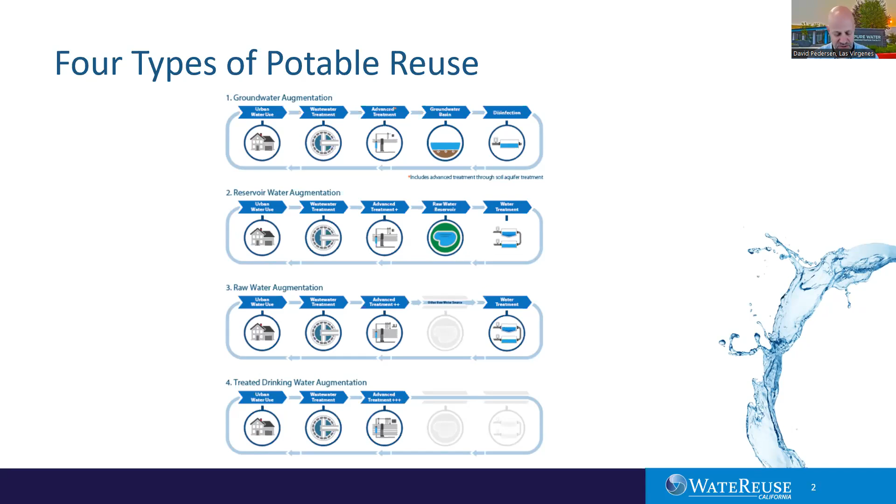What you're seeing here are the symbols that represent the different elements of the treatment strategy, beginning with urban water use at a home, the wastewater treatment. That is common for all of them, followed by advanced water treatment. And then you'll see the variety in the last 2 steps: the use of a groundwater basin in the top strategy, a raw water reservoir in the second one, and then in the final 2, a more direct strategy involving either water treatment or direct delivery into the distribution system. Typically, the first 2 have been referred to as indirect potable reuse, or IPR, and the last 2 as direct potable reuse. So just a little bit of nomenclature.

I wanted to talk about the path to get to where we are. Last year in December, our State Water Board adopted regulations for direct potable reuse. It was quite a long journey to get there, dating back 13 and maybe even more than 13 years. WateReuse, our association here in California was a key part of that, along with our legislators, and probably many of you played a role. I'm going to highlight just a few of the critical elements, emphasizing the role of both research and legislation in driving this.

Back in 2010, there was a landmark legislative measure, SB 918, authored by Senator Fran Pavley, who represented my service area and still is a customer here at Las Virgenes. That bill called for two important things: first, to develop and adopt uniform water recycling criteria for indirect potable reuse—essentially, regulations for indirect potable reuse. Second, it called for evaluating the feasibility of direct potable reuse. That legislation set the groundwork for what was to follow over 13 plus years.

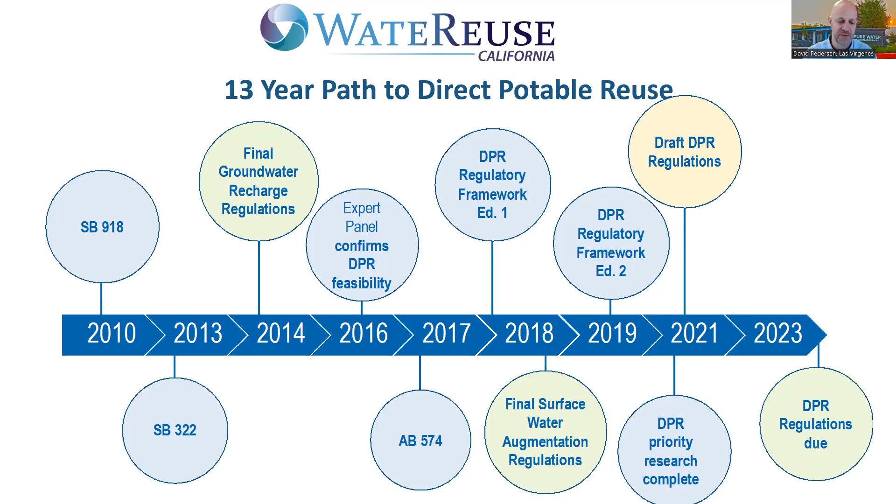In 2017, there was a second legislative bill, AB 574, authored by Assemblymember Bill Quirk. That took the next step, calling for the State Water Board to develop and adopt the direct potable reuse regulations by December 31st of 2023—a goal the State Water Board ultimately did meet, adopting those regs on December 19th. A few other milestones: groundwater recharge regulations were adopted in 2014, the first pathway I showed on my previous slide. Then the final surface water augmentation regs were developed in 2018. The DPR regs covered both varieties of direct potable reuse: raw water augmentation and treated drinking water augmentation.

So big picture, looking at the role of water recycling in our state, what these regulations really do is help advance the emphasis that California has on water recycling. There's a variety of reasons for this, but probably most important is that water is too valuable to use only once, and that we have a great resource in our treated wastewater to recycle and recycle more, create a new drought resilient water supply, and to do it cost effectively.

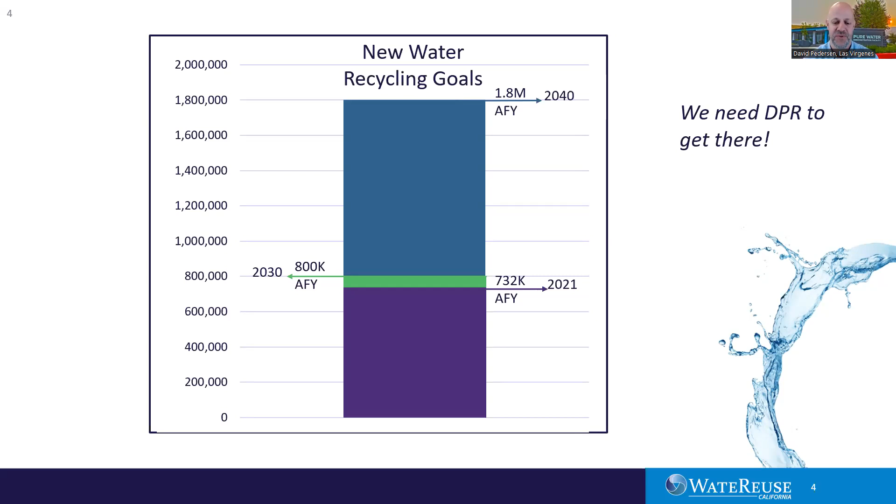The organization that is doing the project, or organizations plural, the chemical control, pathogen control, the monitoring mechanisms and control of the treatment, and then the capabilities, which are referred to as technical, managerial, and financial, of the agency that is doing the work.

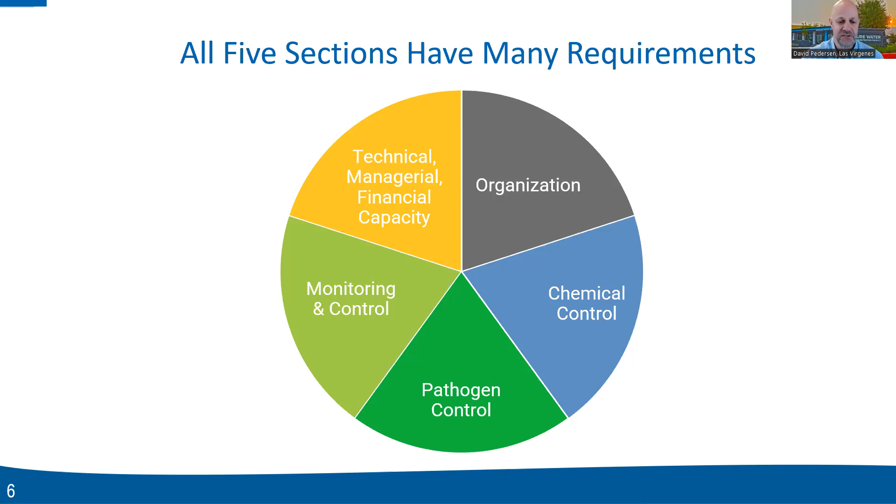So in terms of the organization that's responsible, the term that you may have heard is DiPRRA, which is just the acronym for Direct Potable Reuse Responsible Agency. I know that's a mouthful, and so that's why we've been using the word DiPRRA. In short, the DiPRRA is the agency that is essentially accountable to ensure that the regulations are met.

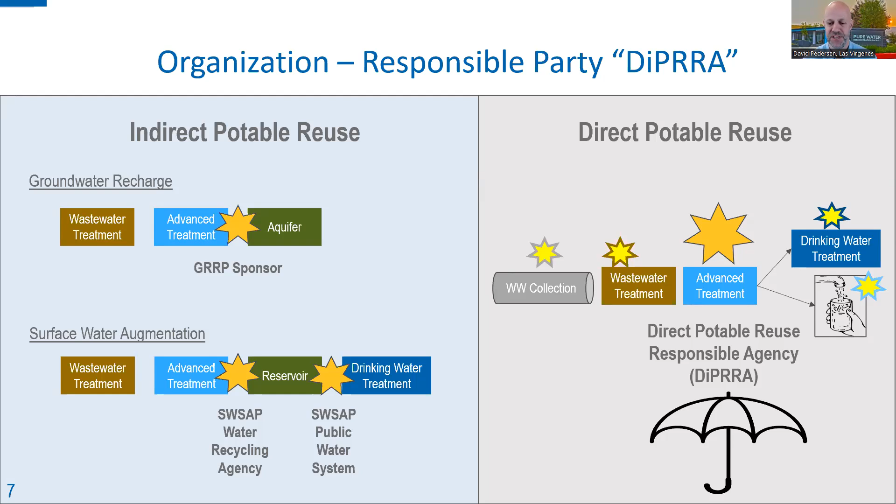And you can see on the left is the indirect potable reuse companions. They use slightly different terminology: groundwater replenishment reuse project sponsor, also a mouthful, and surface water source augmentation project sponsor. So that is sort of the who, and you'll see that there's a combination of wastewater and water. Essentially, the key element here is the party that is operating and responsible for the advanced water treatment and placing the water ultimately into the drinking water system is the DiPRRA.

So chemical control, a really important part of the regulation, and I would say a distinguishing factor from indirect potable reuse in terms of treatment train and process. This is probably the most technical slide I'll have. There is a new requirement of an additional treatment process that is unique to direct potable reuse that you will not find with indirect, and that's the inclusion of ozone and BAC. So ozone BAC is required as part of the treatment train for DPR, and it needs to be in the order shown here: at the beginning of the treatment process before RO and UV or advanced oxidation.

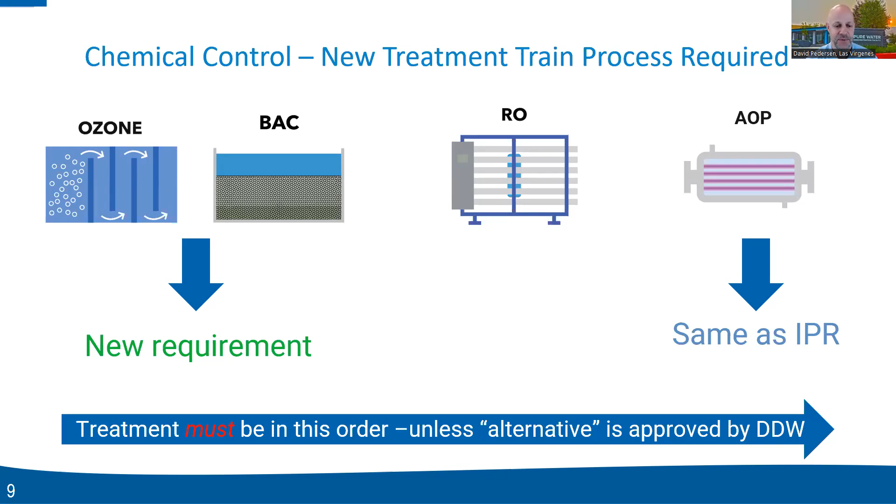And the reason for that is chemical control. Source control on DPR is a really important element. Those of you in the wastewater business are familiar with source control. On the drinking water side, maybe a little bit less so, but now that the two are coming together, it is really important to have a robust source control program to ensure that some of the exotic contaminants are not getting into our wastewater system that is ultimately reaching advanced treatment and possibly passing through that treatment or creating a higher risk in terms of contamination of the drinking water.

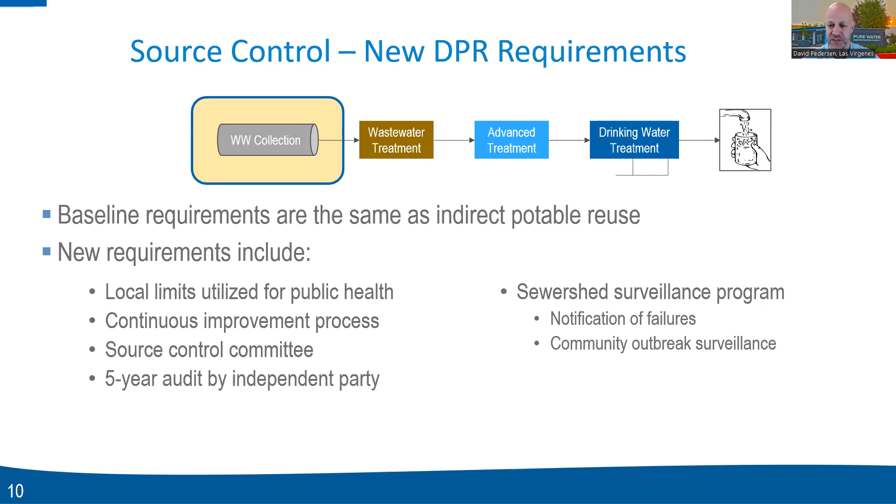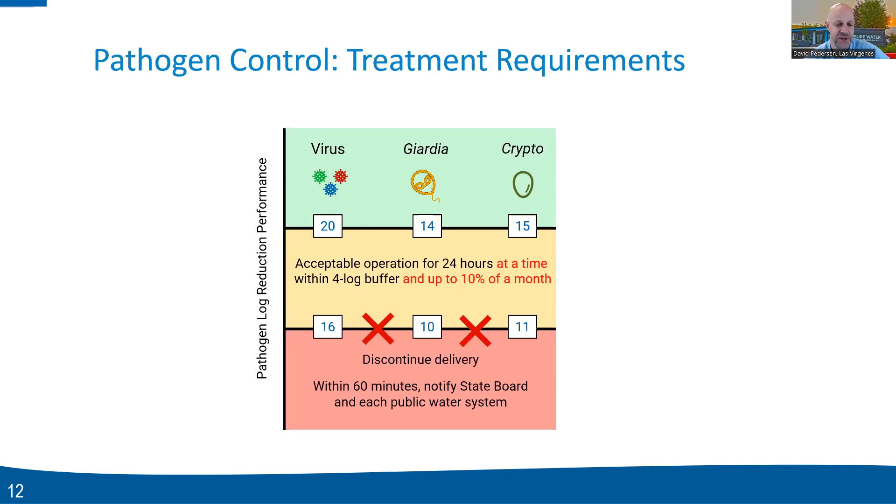That reflects what needs to be achieved before discontinuing operation of the plant. There's acknowledgement that there may be times where a certain element of the treatment train may not be completely effective, but because it's a multi-barrier treatment system with redundancy, the process doesn't necessarily need to stop immediately. But if you do drop below any of those numbers, 16, 10, and 11, you need to shut down your treatment system, the delivery of water to the system, and make notification.

I'm going to stop sharing and highlight one final point before introducing Daniel. Going forward with direct potable reuse, what we're talking about is taking water recycling to the next level in California. There are a couple of guiding principles that are really important here, and they all revolve around three things: trust, transparency, and safety.

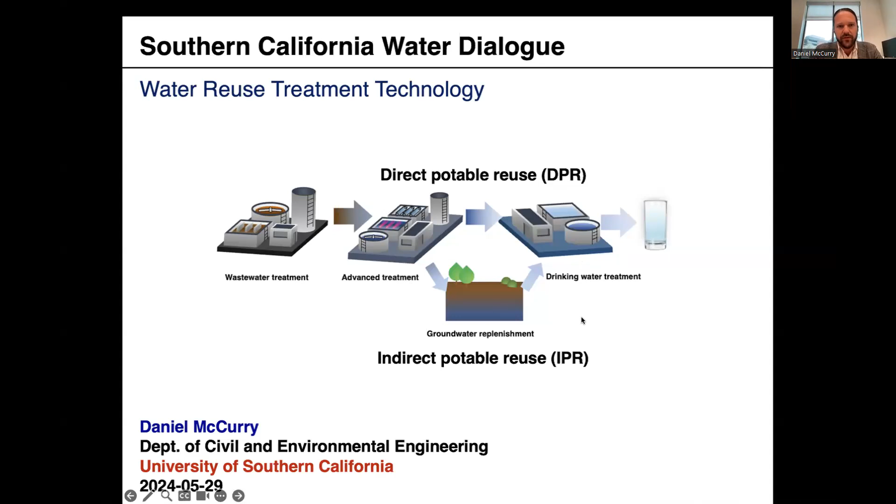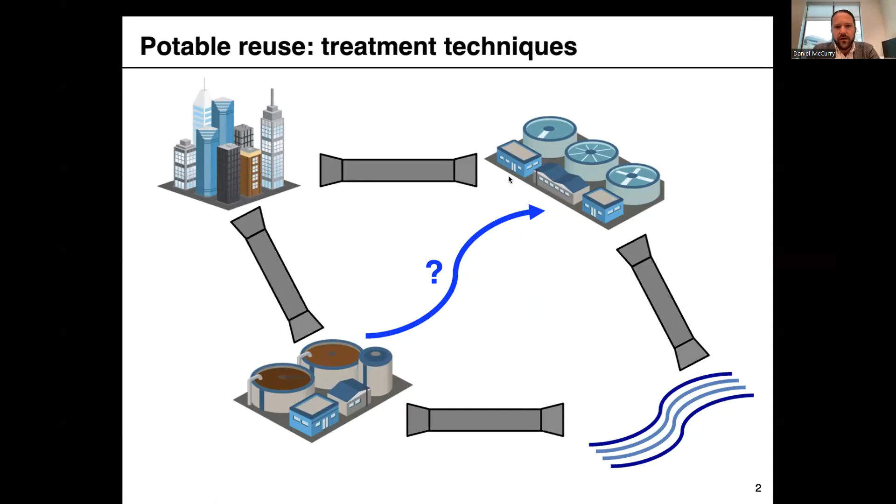In other words, what sort of engineered processes does it take to go from treated wastewater effluent, say the water coming out of Hyperion that would normally be discharged into the ocean after biological treatment for safe ecological discharge, and upgrade that water quality to a point where we can potentially use it as a drinking water source? Before I talk about treatment technology itself, I wanted to talk about what exactly we're trying to get rid of. Dave teed this up nicely already by talking about log removal and these pathogens.

Before I talk about direct potable reuse, let's look at the existing indirect potable reuse regulations. We have three rules for removal of three different types of pathogens: Giardia, Cryptosporidium, and viruses. Giardia and Cryptosporidium are both single-celled organisms. Giardia is commonly associated with drinking untreated water in the woods if you're backpacking. Cryptosporidium was associated with a major waterborne illness outbreak in Milwaukee about 30 years ago, so that's been at the top of our mind for pathogen control in the water business. And various viruses can make you sick as well. So these are the existing rules for indirect potable reuse, the 10-10-12 rules.

Because this concept of log removal is often not explained in detail, I thought I would introduce it, since I had to honestly look it up for myself as a graduate student to figure out where these numbers come from.

I thought it would be wise to start by talking about removal or percent removal, which I think is the more intuitive way to understand how well disinfection has worked. This corresponds to the number you might see on hand soap or hand sanitizer. As a thought experiment, removal as a percentage is just 1 minus the number of organisms alive after disinfection divided by how many you started with. So as a simple example, if you had 100 viruses at the beginning of disinfection, and at the end there's 1 left, that's 99% removal. That should be pretty intuitive.

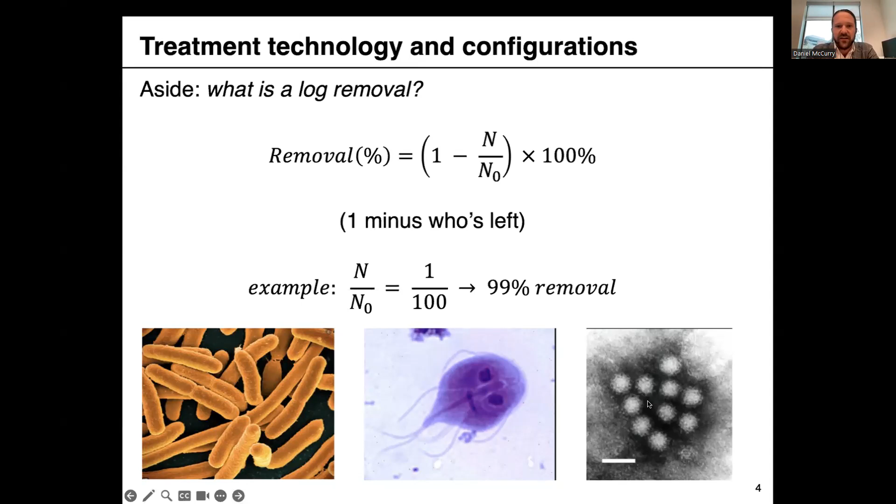The problem is that once you start adding more 9s, this gets cumbersome. If you run it out past about 99.99%, it starts to get a bit unwieldy. So in our business, we've invented a new way of expressing the degree of disinfection called log removal. This is the only slide with math on it in this presentation.

For log removal, you take that same n over n-naught value, the number of surviving organisms left after disinfection divided by the number you started with. Instead of subtracting that from 1, we take the negative log base 10 of that number. In case you haven't done logarithms in a while, I'll work through a quick example using the same numbers as before.

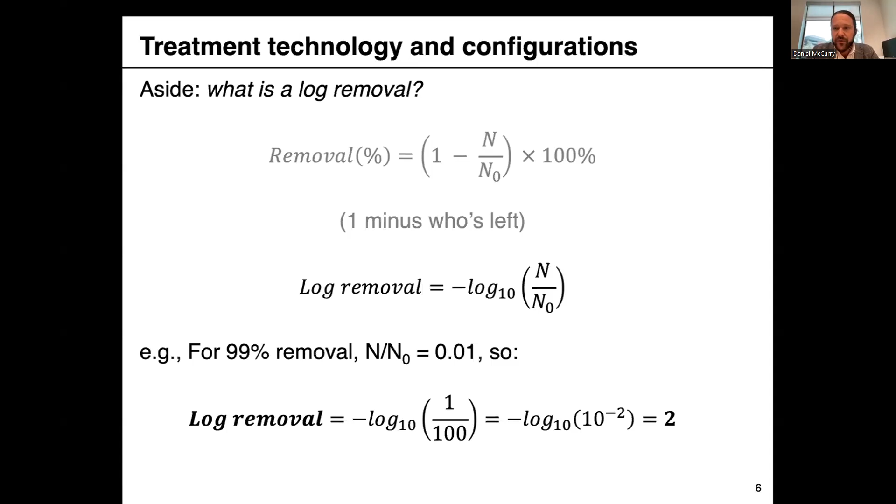If we have 99% removal, so we started with 100 organisms alive and there was 1 left at the end, n over n-naught is 0.01, which is 1 divided by 100. You can convert that 1 over 100 to 10 to the minus 2. If you remember pre-calculus, a log base 10 and a base 10 exponential cancel out, so you have minus minus 2, which gives you a log removal value of 2. That's how log removal values work.

So 99% removal would correspond to 2 log removal, 99.9% to 3 log removal, and so on. This system is a convenient shorthand once we get into high log removal values, because for instance 20 log removal, which we'll see in a second for direct potable reuse regulations, would be 99 points and then 18 nines after that—again, a bit cumbersome.

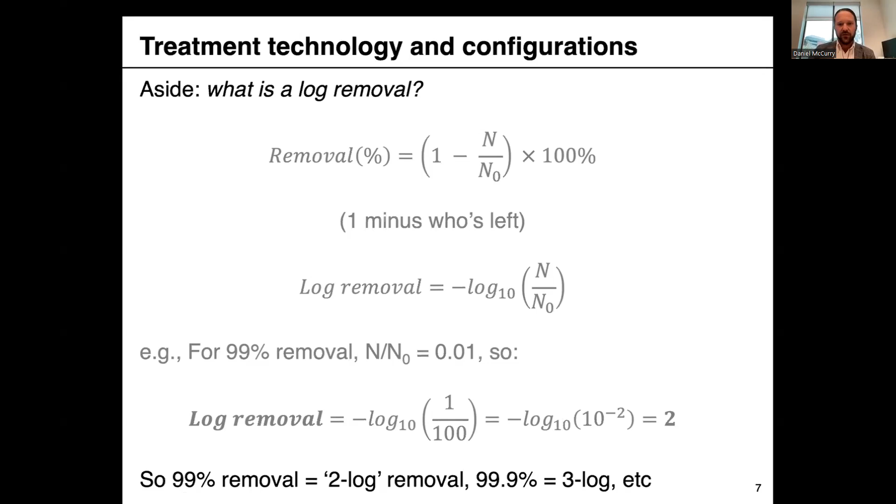As we move from indirect potable reuse to direct potable reuse, these numbers all get increased for each of the three pathogens. So it's the same pathogens as in the indirect potable reuse rules, but now the degree of removal has increased. For instance, we go from 10 log removal of Giardia to 14 log. If you undo that log transformation, that's a 10,000-fold increase in the degree of disinfection—you can only have 1/10,000th as many left alive at the end as would be permissible for indirect potable reuse. So these regulations are quite protective of public health, especially for pathogens, which is our number one concern, whether it's potable reuse or ordinary surface water treatment.

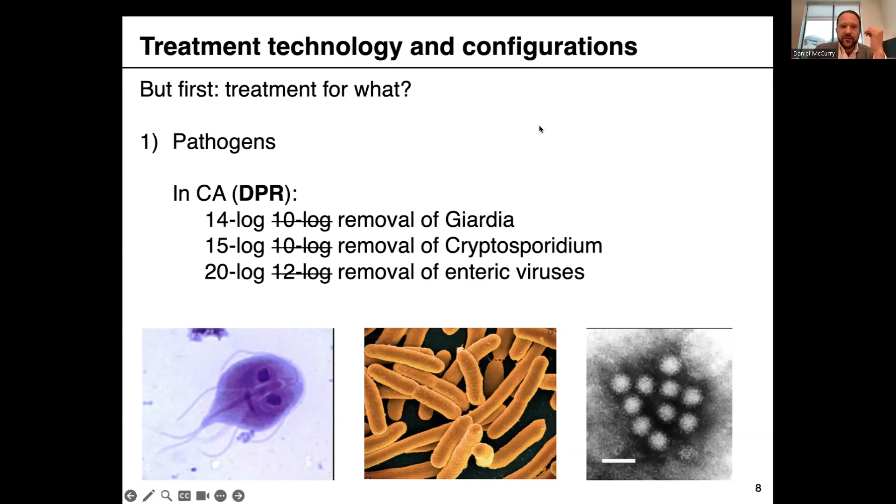After we've satisfied ourselves that pathogens have been adequately controlled, the next thing we need to take care of in direct potable reuse are chemicals.

This differs quite a bit from ordinary surface water treatment. If you're treating water from one of the aqueducts that brings water from Northern California, a lot of that is basically melted snow from the Sierras that's quite clean. In contrast, wastewater is full of all kinds of chemicals - anything that goes down the drain, whether excreted by humans or illicitly dumped by an industrial factory. These chemical concentrations are much higher than we'd worry about in an ordinary water source, so we need to be serious about chemical control.

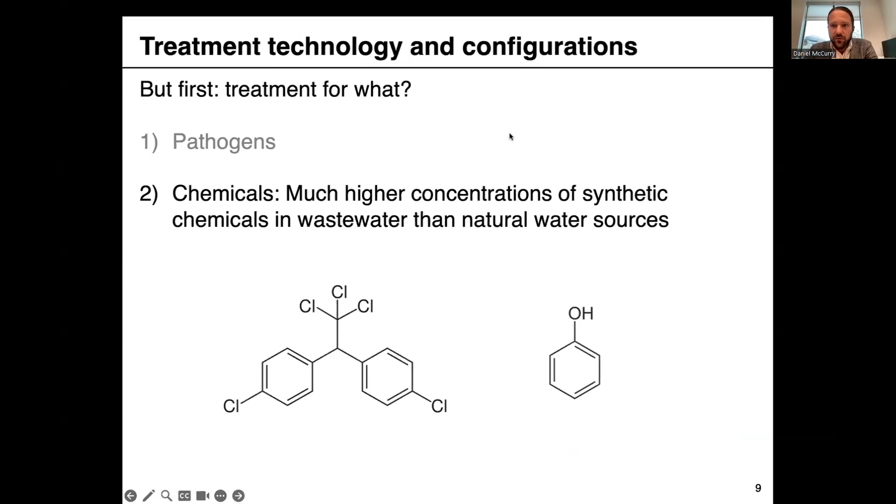First I'll talk about the indirect potable reuse rules, then move to direct potable reuse. In California, for indirect potable reuse, you have two options for demonstrating adequate chemical control. One requires demonstrating removal of 7 or 8 different compounds, choosing one from each of several categories. The simpler way is to demonstrate 0.5 log removal of 1,4-dioxane.

One of the other key reasons for choosing this compound is that it's almost unique in how well it can get through reverse osmosis, which is one of the key treatment steps for water reuse. So if we're doing a good job of 1,4-dioxane removal, we're probably removing everything else pretty well too.

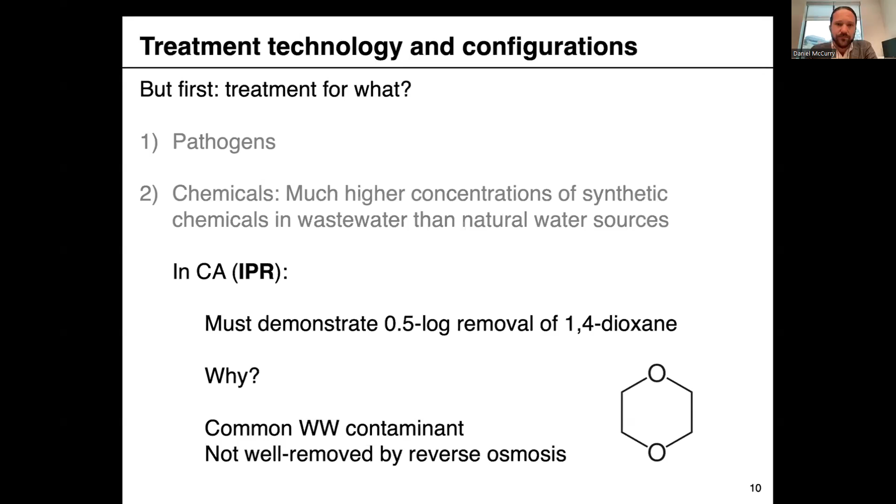As we move to direct potable reuse, a new compound was added - you have to demonstrate 1 log, or 90% removal, of formaldehyde, shown on the bottom right. It's a low molecular weight compound that can get through reverse osmosis very well, which is part of why it was selected. Another reason is that formaldehyde is often formed when you add ozone to wastewater, and ozone is a required treatment step for direct potable reuse in California - so we're getting ahead of a potential complication of using ozone. For all these regulated compounds, the reason we care about them is they're known or thought to be toxic to humans.

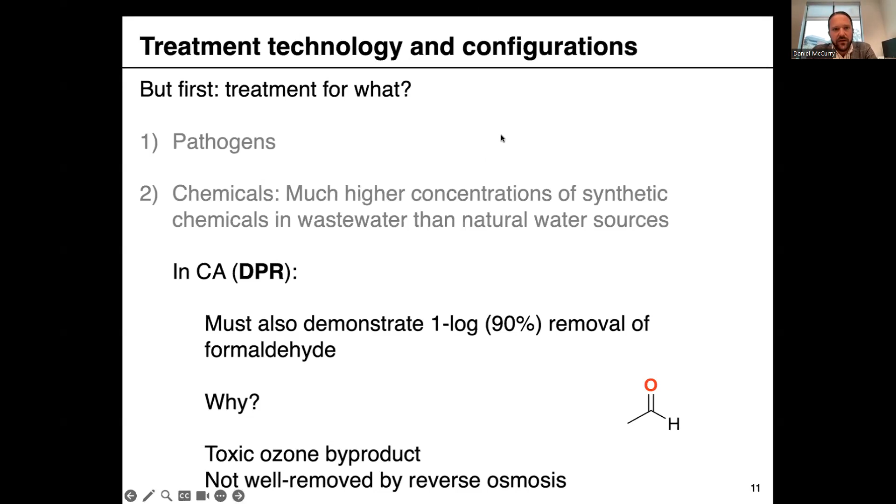Now let's move into how you actually get rid of some of these chemicals and pathogens. I'll begin with the existing state of things prior to the new rules passed in December. For indirect potable reuse, where recycled water is sent either to the ground or for surface water augmentation, the classical treatment train - spread pretty widely across the US and even the world, and a close approximation of what's at Orange County Water District, the largest water reuse plant in the world - has essentially 4 main water treatment steps. There are a few little adjustments here and there, but this is really the core of the water reuse treatment train for IPR.

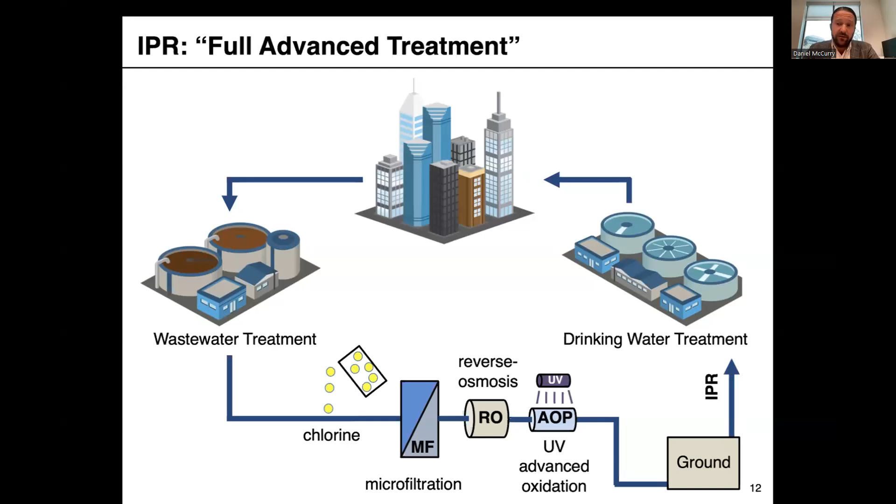I'll go through each of these steps in more detail, about one slide each, but to name them first: we first disinfect, often with chlorine, then remove particles with microfiltration, then remove even smaller particles and some chemicals with reverse osmosis, and finally treat any remaining chemicals with UV advanced oxidation.

The first step is disinfection, a chemical disinfection step that serves two purposes. One is to make sure we're killing off pathogens - many steps in the water reuse process are important for pathogen control, but the first one is just simple chemical disinfection, like we already do for surface water treatment, or like you might use to sterilize a cutting board in your kitchen.

The chemicals that we use for disinfection most commonly are either chlorine, which is literally the exact same stuff that's in the bleach bottle under your kitchen cabinet, or ozone. I'll talk more about ozone in a little bit once we get to the DPR section.

But one other thing I forgot to say is, besides pathogen control, the other important part of the disinfection step at the beginning of the process is that it helps control biofouling. Because the next two steps all involve membranes, and membranes can easily be clogged, including by microorganisms, which can grow in these sort of cakes that we call biofilms. We'd like to minimize that to the degree possible, so we don't have to spend as much time and effort cleaning membranes, which requires taking them offline.

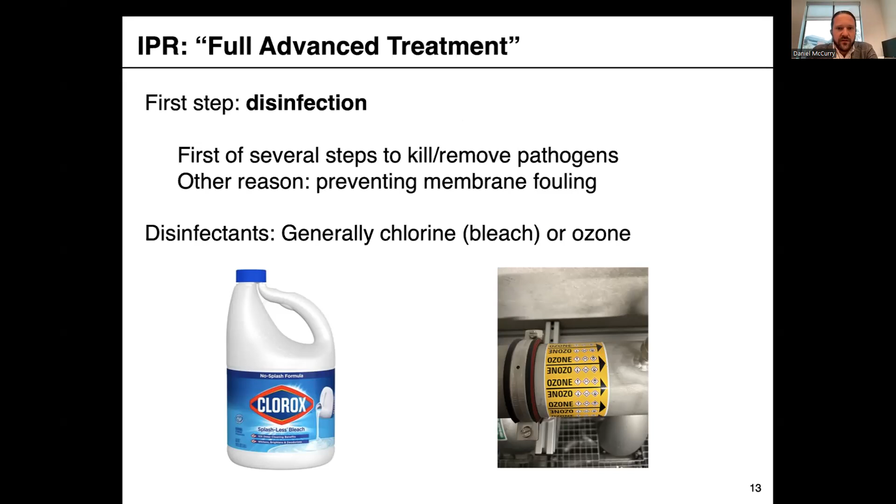So then the next step in the treatment process involves membrane separation, sometimes called filtration, although people argue whether or not reverse osmosis should be considered a form of filtration. But regardless, it's often microfiltration, maybe sometimes ultrafiltration, but those are closely related, and then reverse osmosis. I'll say just a few words about each of these individually.

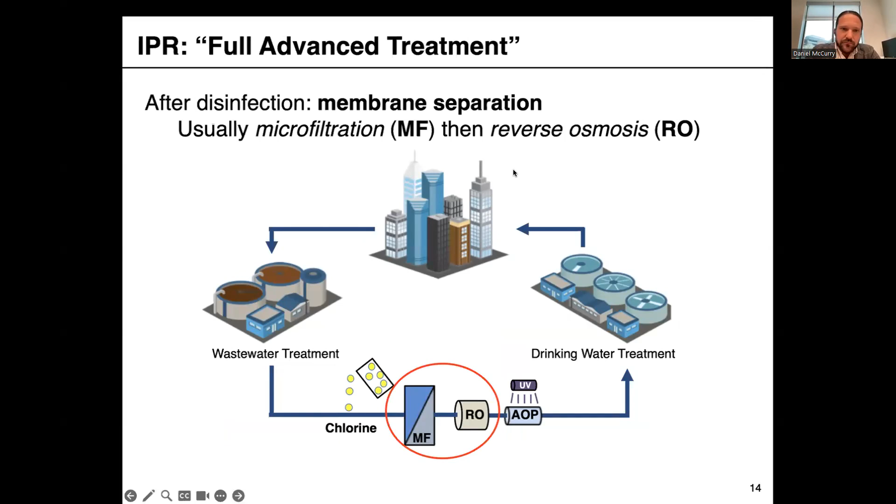Microfiltration, as the name implies, is a filtration step meant to remove particles on approximately the 1 micrometer or 1 micron scale. That can be anything from just dirt, literally silt particles that might end up in the drain, and also some bacteria or other types of single-celled microorganisms. It won't do anything about viruses, for instance, because those are too small and will pass through the microfiltration pores. But many bacteria can be removed, as well as particulate matter.

Part of why we want to remove particles at this stage is that if we leave particles, which again can just be dirt, in the water, it can interfere with some of the subsequent steps. It could lead to clogging of the reverse osmosis membrane, or sort of light screening in the UV advanced oxidation process, which is not really ideal.

Then after microfiltration, we have reverse osmosis. This is another type of membrane separation process—again, people argue about whether it should be considered a form of filtration or not. But essentially, the goal of this is to remove almost everything except for water molecules. Sometimes people, as a shorthand, will say that reverse osmosis removes everything but water. That's not quite true, as we'll see in a second, but it does a very good job of removing almost all chemicals. So essentially anything that's charged, any ions, are extremely well removed.

That includes just salt, as well as any chemical that's above a certain size. You might encounter a molecular weight cutoff of something like 100 Daltons for things that tend to be removed well by reverse osmosis. So it's a very robust treatment step—arguably the most important central water treatment step for water reuse.

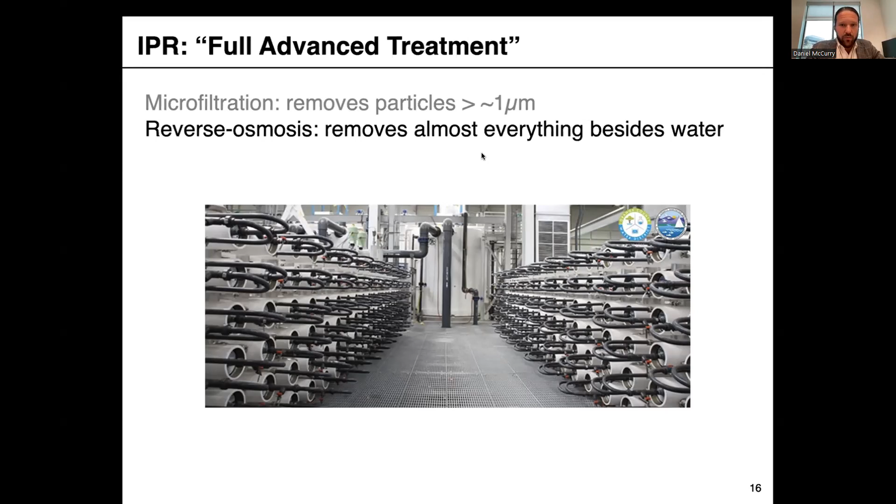Like I said, it removes almost everything except for water molecules, not quite everything. There's been one or two famous episodes that highlighted maybe a vulnerability of reverse osmosis, which is that while it does a very good job for most chemicals, there's a certain formula for a chemical to get through reverse osmosis: it has to be neutral, so uncharged, low molecular weight, and polar. It has to have sort of an uneven electron distribution. A handful of chemicals that you might expect to find in the sewer can satisfy those criteria.

One of them, for instance, is acetone, which is a really common solvent in industry—it's also nail polish remover. There was this famous episode at one of the large water reuse plants in Southern California about 10 years ago, where they detected a big spike in organic carbon, which we use as sort of a catch-all bulk parameter for chemicals that might be coming out of reverse osmosis. There was this big spike in both the feed and the product water across the RO membrane at one of these plants, which was ultimately traced back to acetone, thought to be from an illicit industrial contribution to the sewer.

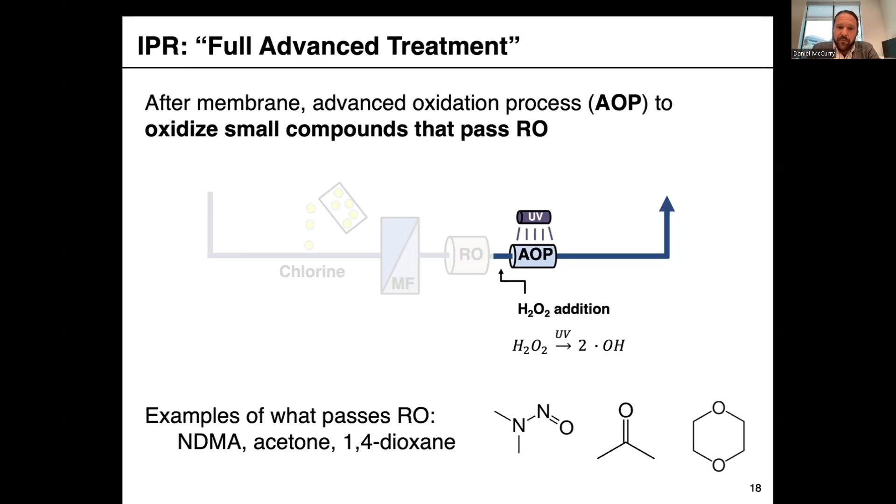Some of the compounds we care about that might get through reverse osmosis, like NDMA, which is a disinfection byproduct—that's the first compound shown there—and then acetone and dioxane, which I talked about already. The UV AOP step does a pretty good job of tearing apart all these chemicals.

So then getting close to the end here, as we move from indirect potable reuse to direct potable reuse, as Dave said, the new rules require the addition of two new treatment steps: ozone and biological activated carbon. I'll talk about each of these with one slide or so now.

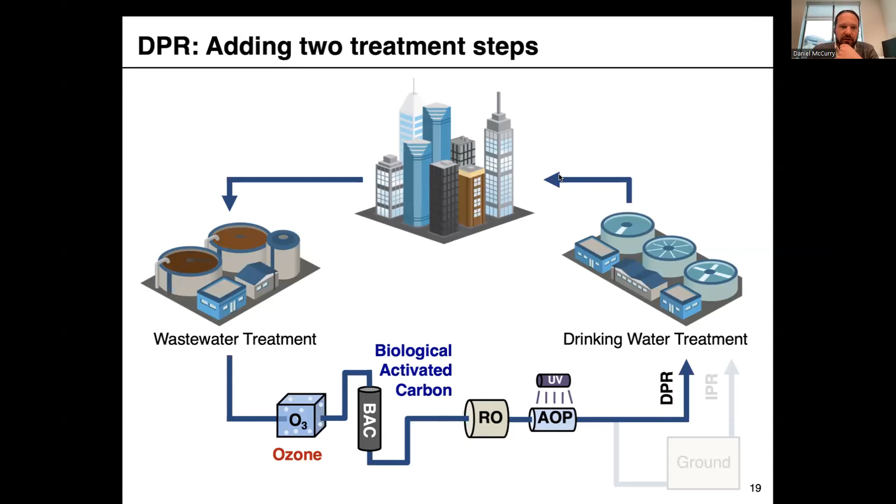So ozone, as I mentioned at the beginning, is a disinfectant. It's sometimes used at the beginning of even indirect potable reuse plants, and it's a really, really powerful disinfectant. It's very fast at killing pathogens, viruses, and bacteria, much, much faster than bleach even. Another advantage of ozone is that you can make it on site—all you need is oxygen, which can be compressed oxygen, liquid oxygen, or even just air, which is 20% oxygen, plus electricity.

Essentially you pass oxygen over what's basically a giant bug zapper, and it electrolyzes the O2 molecules, the oxygen, into O3, which is ozone. So it's a convenient thing—you just need oxygen and electricity.

Same concept. The purpose of using ozone in these DPR rules is, obviously, it will kill some pathogens, but also it helps with chemical control, because certain chemicals are too large to be readily eaten by microorganisms we use during normal wastewater treatment. At a plant like Hyperion, for instance, we apply microorganisms to break down chemicals before releasing wastewater into the environment, but not all chemicals are easily biodegradable.

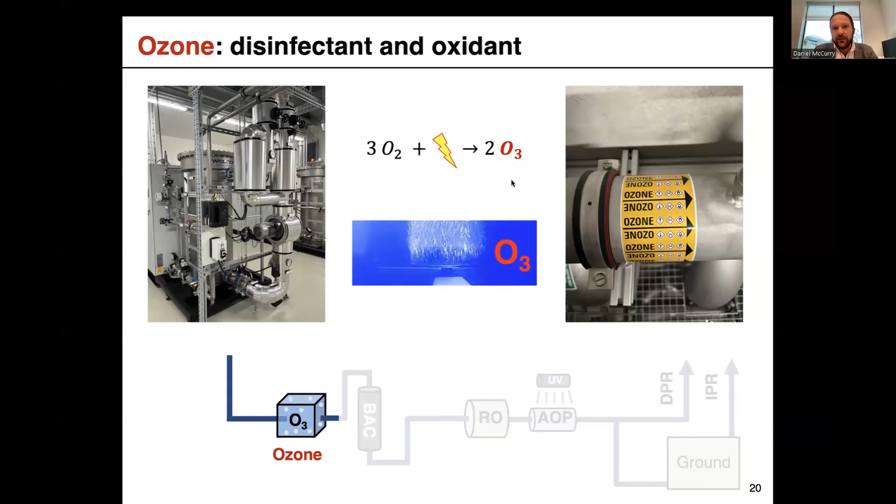So the theory here is that ozone can take some of those larger chemicals that are too big a mouthful for a bacterium, chop them into smaller pieces, and then hopefully they can get eaten during the next step I'll talk about, which is the biological activated carbon step. There's kind of two ingredients here. The first one is activated carbon, which you can almost think of as a form of charcoal. The process for producing it is a bit more complicated than just digging charcoal out of the ground, but it's made of the same stuff.

It's essentially carbon with a really high surface area. It's the same stuff that's in a Brita filter if you have one of those at home. We use activated carbon for many applications in water treatment, usually as a sorbent, something meant to grab compounds out of water. That's its purpose in a Brita filter.

But for BAC, it's a little different. We actually deliberately let this carbon get old and allow bacteria to grow on its surface. Because the surface area of activated carbon is really high, we can have a large amount of bacteria growing in a fixed volume. So as we pass that ozonated wastewater, with the larger chemicals having been chopped up by ozone, into the BAC column, the thought is that those bacteria can munch on those bite-sized pieces to get rid of some of the chemicals in the wastewater.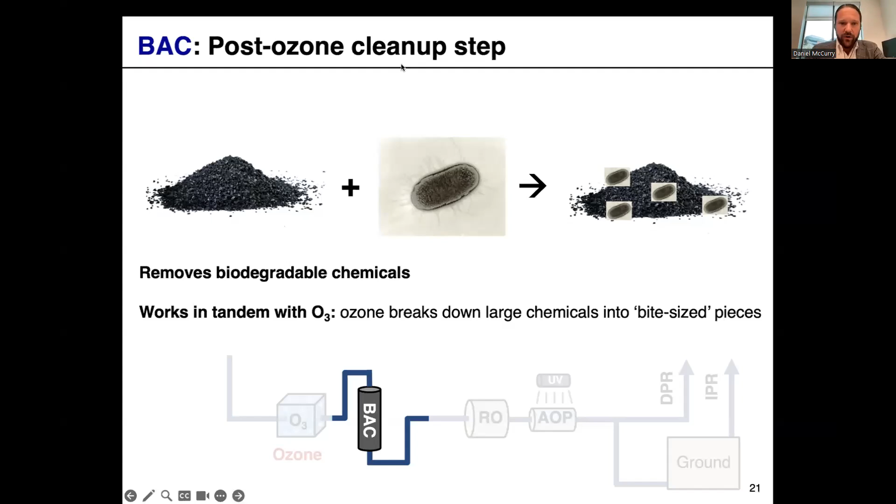So the last thing I'll say, I don't really have a conclusion slide, it's just to mention that these direct potable reuse rules in California, passed in December, are a little bit unique in that they're quite a bit stricter or more protective than the rules for direct potable reuse in certain other states. I won't get myself in trouble by naming other states or editorializing about whether their approach is better or worse than ours. But some places besides California allow direct potable reuse, or are at least considering allowing it, without a reverse osmosis step.

So it's just ozone, biological activated carbon, and then UV advanced oxidation. That has certain operational advantages because reverse osmosis generates a salty brine that you have to put somewhere. Here in California, we can send that to the ocean. In an inland state, you can't. But you do lose the treatment benefit of that additional separation step.

So I'm at exactly 20 minutes as far as I can tell, so I'm going to stop there.

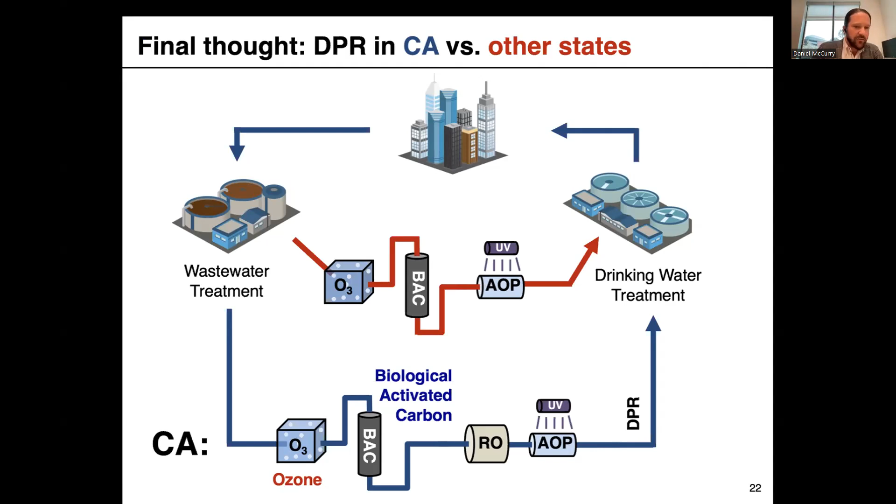I think we're coming back to me, and I want to talk before we go to Q&A a little bit about some of the practical implications of having these regulations in place. As an organization, WateReuse, we've been talking a lot about the fact that we're at an inflection point of sorts in our journey in water recycling. What we're referring to is that for a decade or more, we've really been focusing on getting the tools in place to allow us to build these projects involving indirect potable reuse and direct potable reuse. We now have them. So the question is, what do we need to make these projects happen?

And I'll share that there's more work to be done to really answer that question. I think some of the things like the research, there's more to be done. So it's not over. I'll give you an example: in the area of research, one area where more work can be done is real-time water quality monitoring, like in the area of pathogens. So there's more work to be done on research, but I do think a pivot of sorts is in order on actually building these projects.

And these are large projects, most of them the most expensive and ambitious projects that the organizations sponsoring them have ever undertaken. I'm going to try to share my screen. Let me share my screen here for a moment. I just want to show, if you can see that, give me a thumbs up, Dan, if you can.

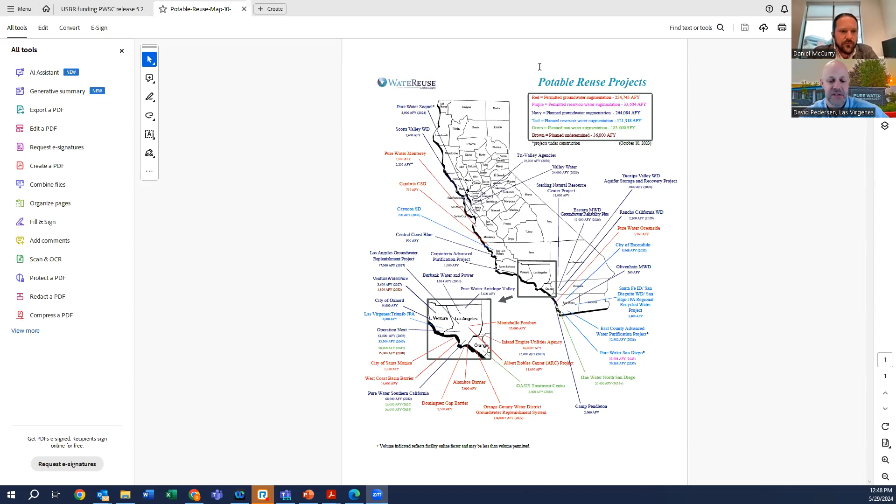That's a map showing the potable reuse projects throughout California. I'm not going to go through them all, but I wanted to highlight that there are projects across the entire state. So this is not a coastal issue, an inland issue, or a Southern California issue. This is all of California. There are projects large and small across the entire state in different stages of readiness in terms of moving forward, and they're color-coded depending on the type of project, whether reservoir augmentation, raw water augmentation, or even in some cases, direct potable reuse.

I'm going to take that down just so you can see me, but you can get that graphic from the website, WateReuse California. Just Google it and it's there. If you have a project and it's not there, we're eager to add it. And I'll tell you, the second we publish that map, it changes. So I want to highlight a few of the major projects because they're important.

Yesterday was a really important, landmark day in water recycling, because the U.S. Bureau of Reclamation announced the grant awards for what they call the Large-Scale Water Recycling Program. Two of the three projects are California projects. There was a press event at the joint facility of Metropolitan Water District and the LA County Sanitation Districts to receive that grant funding, which was almost $100 million - I think it was $99 million - to support that joint project.

That project is called Pure Water Southern California. It's an effort between Metropolitan Water District and the Los Angeles County Sanitation Districts. It involves building what will ultimately be a 150 million gallon per day project, combining groundwater augmentation and raw water augmentation. There's a demonstration facility at the sanitation district's main joint plant in Carson, and that's where the press event was.